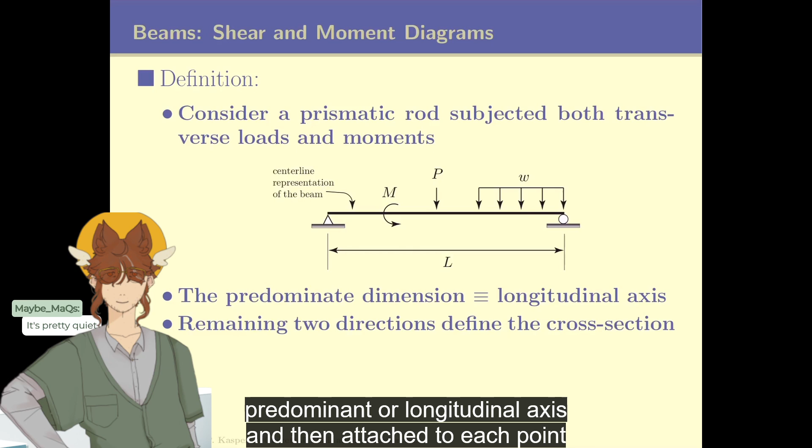How are we feeling about that - the predominant or longitudinal axis? Then attached to each point along that length, we're going to have a cross-section. That's very similar to what we saw with the axial model and also the torsion model, where...

The torture model. The torture model? Okay, wait, sorry. Okay, so... basically... the torture model is making sense.

Okay, prismatic rods subject to transverse loads and moments. So we just have a very long beam that has a very small cross-sectional area. The torture model.

We have a length of beam, and the basic idea is we're just gonna go along this beam and figure out all the additional stresses and stuff on it, which is gonna be fun. We can make a diagram for what those things are gonna look like. I have done these, but I didn't really do them well.

In this model, we would have a one-dimensional line that was the center of twist, and then attached to it at each point along the longitudinal axis would be a cross section, like when I walk across a beam, either solid circle or a hollow circle, and that's kind of how we're going to view this.

We're also going to restrict the geometry such that the cross section is significantly smaller in size than the length. It's like spaghetti. If you imagine drawing a circle around the cross section and took its diameter, it would be significantly smaller than the length of the beam.

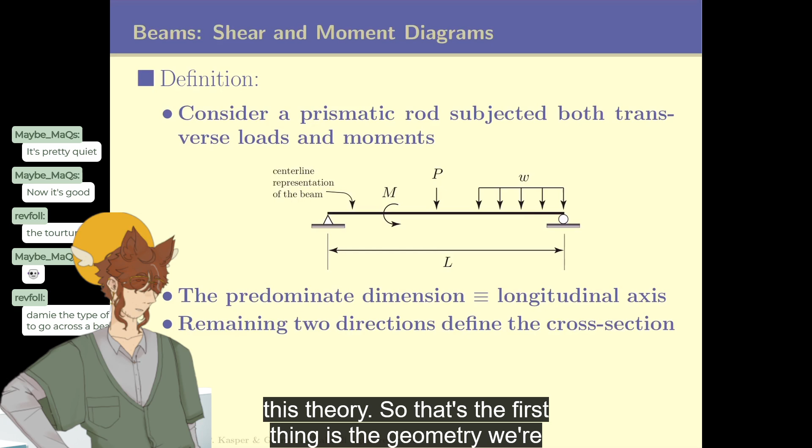We're limiting ourselves to setups where that geometric assumption is appropriate.

Basically, everything is beautiful and nothing sucks. That's the only type we're going to consider. We'll make some additional assumptions a little bit later.

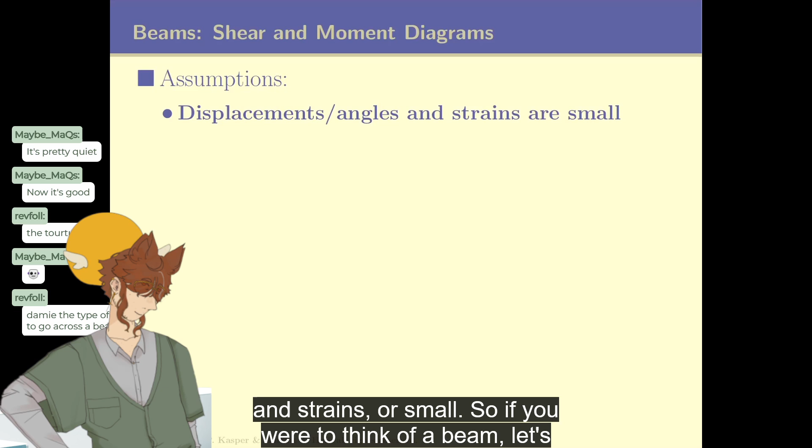The second thing we're going to assume is that our displacements and strains are small. So if you were to think of a beam, let's say something roughly of this geometry.

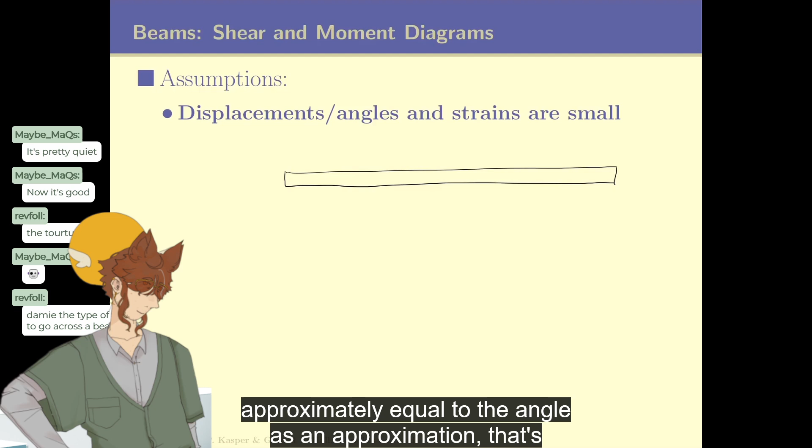The angles of rigid body rotation of the system are going to be very small, such that if I were to take the sine of the angle, it's approximately equal to the angle as an approximation. That's fairly appropriate—the small angle approximation.

The reason we don't allow for larger strains or rotation angles is because, recall, for the axial model we approximated the normal strain in the x direction as the change in length over the original length, assuming the body is rigid. We talked about how, if it wasn't rigid, we'd need to include a second order term, something like the change in length over the original length, squared.

The idea is that the linear strain measure we use only includes the first term—we don't have to do differential equations—because this second order term is approximately zero in comparison to the first term in the series. If that's not appropriate, then this theory isn't appropriate, and we'd have to use a nonlinear strain measure. That's broadly what we're talking about.

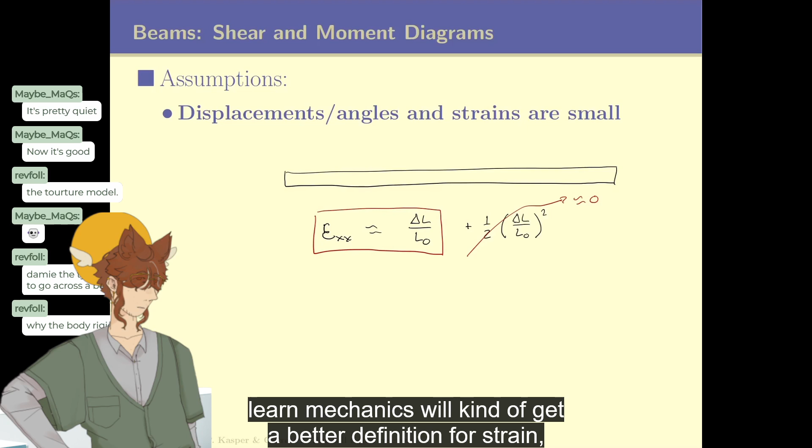We'll return to this later—as you go on and learn mechanics, you'll get a better definition for strain. But for now, roughly, the angle of rotation is simplified so it's easier to work with; you don't need that extra small correction. The first order term is kept, while the second order term is small in comparison to the first. If those two assumptions are violated, we'd turn to a different type of theory.

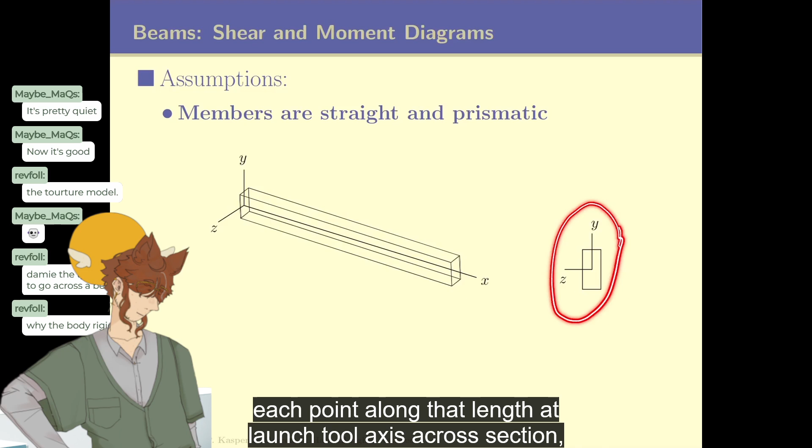The next assumption we're going to make is that the members are straight and prismatic. We're not going to allow for curved beams at the moment, so we'll limit our geometry to straight members, and then define at each point along that longitudinal axis a cross section, as shown here.

That'll be the next assumption, and then we'll consider just a couple types of loads: point loads, like shown here, point moments, and distributed loads. If you recall what's unique about this set of loadings—if you looked at the axial model, the loads were directed along the longitudinal axis. If you looked at the torsion model, all of our loads were again directed along the longitudinal axis, lined up with the predominant dimension.

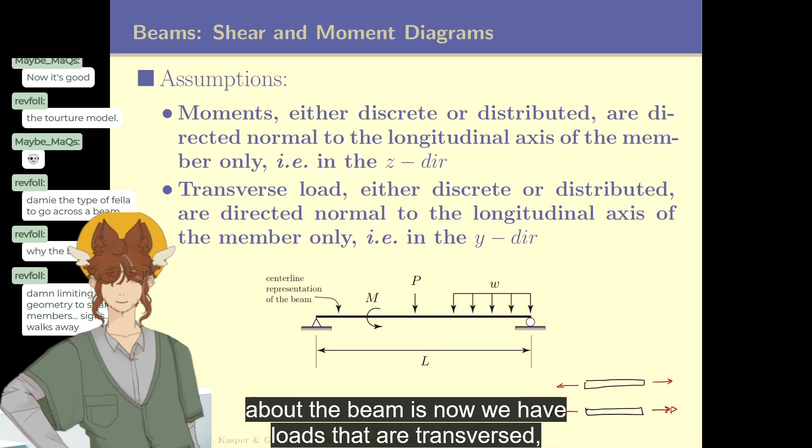Limiting their geometry to straight members, these new loads don't line up with the longitudinal axis—this is the first case we've seen like this. But it's still prismatic. These three types—point moments, point loads, and distributed loads—are what we'll consider.

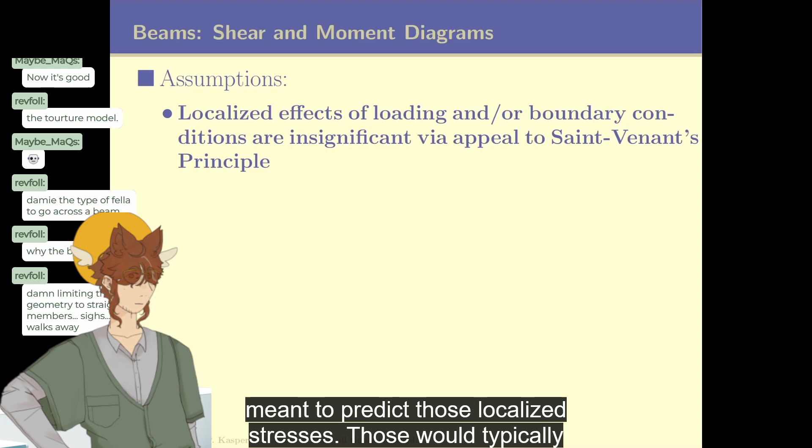The next thing we're going to do is neglect how loads get into the system and how the boundary conditions support the beam. We're neglecting that for now because it involves detailing - how it's bolted or welded, or how the loads are in contact with the beam. All those details introduce local stresses around the region where they're applied. This theory is not meant to predict those localized stresses; those would typically be dealt with in a separate design stage where you look at detailing.

We're going to assume for now that we're not looking at that - that would be handled through a separate design process. This idea that we can ignore the local effects if we're far field from those specific boundary conditions is referred to roughly as Saint-Venant's principle. We're going to appeal to that for now, ignoring how the loads got there.

What is happening? What is this class? Why are loads interacting with each other? Is this math? Okay, let me explain. What's the best way... let me go over to... wait, do I have clip up? I don't have clip up. Let me tell you exactly what this class is, in like two seconds - or maybe not two seconds, that's pretty fast.

This is a very simple class. A lot of my classes are like this. Because I'm on the quarter system, we tend to have very simple classes.

So it's like this: the idea is when you're an engineer - this is a civil engineering class - when you're building buildings, buildings are made out of things called members, which are like beams or whatever. We want to know what happens if we press down over here, and this is on a wall, or what if this member is attached to another member and we press down here. And we press down, but we also press down over an area - like maybe there's a big block here that's pressing down. And what if we also turned it at the same time, like we kind of twisted it? That's what this class is.

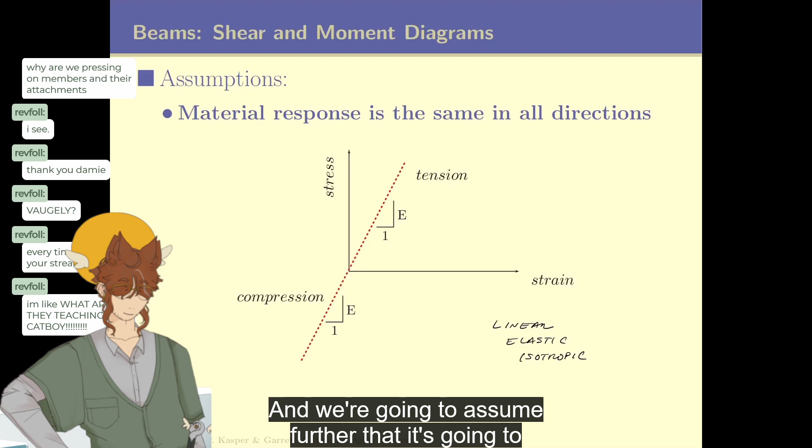We're going to assume it's the same in tension and compression. Here's an example where the line does not change, so you don't get a response like that. That would be a linear response, but it's bilinear because it has one response in tension and a different one in compression. We're going to assume it's linear elastic, isotropic, and the same in all directions.

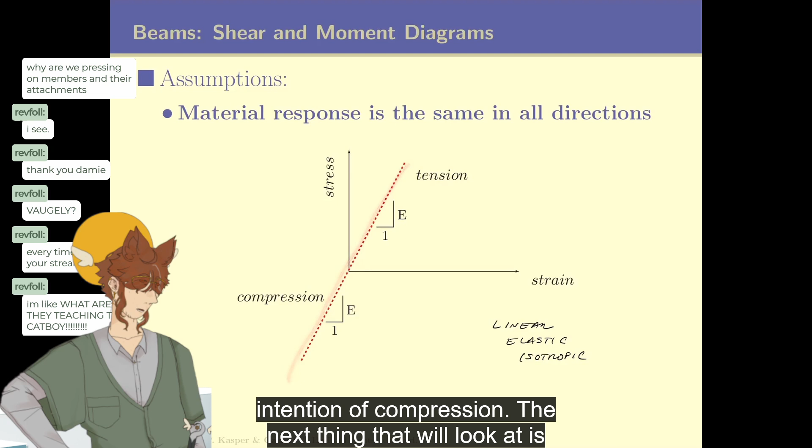The next thing is that we're not going to consider buckling. Just to remind you about the axial problem: if we loaded it like this, we could get a form of buckling. We didn't do any type of analysis on this, we just put it off and said that would be a separate stage in the process where you'd analyze the system for this type of global buckling phenomena.

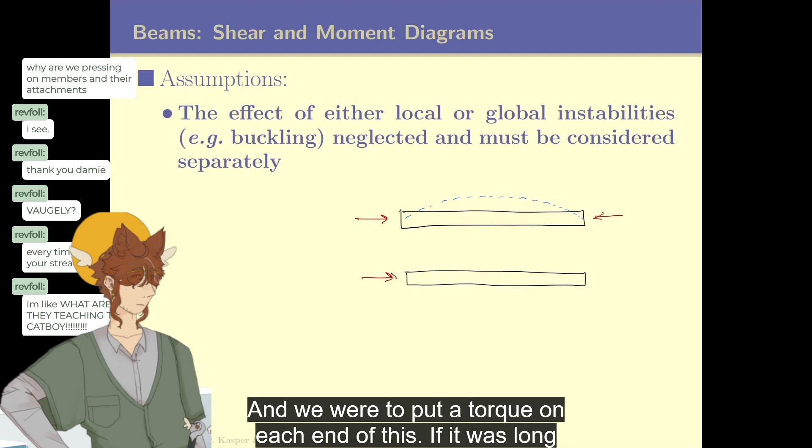Same thing when we got to torsion. If we had a torsional load, our members stay straight, and we put a torque on each end like this. But if it was long and slender enough, it would be possible to get this to buckle. I won't draw the shape very well, but the idea is it's a kind of helical buckling, so it looks something like this. That's a type of buckling you might see in a torsional problem.

In a beam, there's a similar effect where if you take a system and load it transversely, in this direction, supported like this, sometimes what it wants to do is roll out of the plane towards us. So this top surface kind of rolls down like that. That would be an example of a type of buckling you might see in a beam, referred to as lateral torsional buckling.

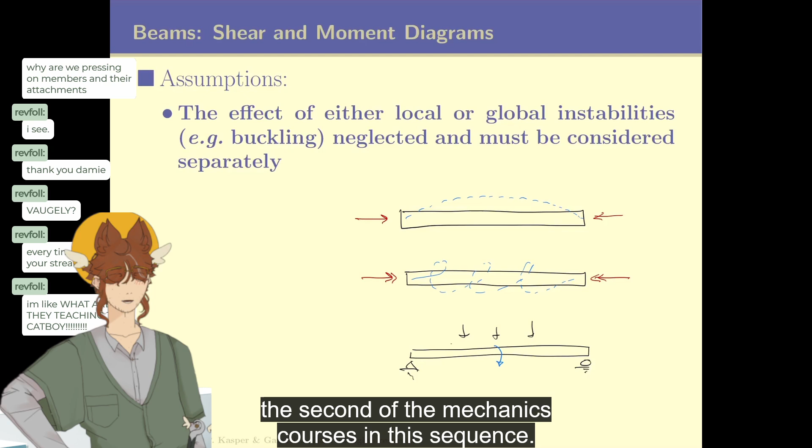Now we're going to do the thought exercise we've done a couple times now - what do you guys think of this one? This is a pretty good diagram. Loaded, we take the undeformed shape and draw a grid on it, that's this geometry right here. Then we imagine it's like a worm - we load the system and see what happens to those lines after the beam is loaded. On the right here we've shown this. Now this obviously violates some of our assumptions about angle changes being small, but we've exaggerated it here to get a feel for what the lines look like.

What we're going to learn a little bit later is that these lines that go this way and this way, for example over here, are still going to remain straight lines - they didn't twist. Those two lines define how the member has been bent before and after, it's like a happy face. That'll be one of the kinematic outcomes when we develop the theory of this. Visually, this is what it looks like, just to give you a feel in case you couldn't imagine what a beam looks like when it's deformed.

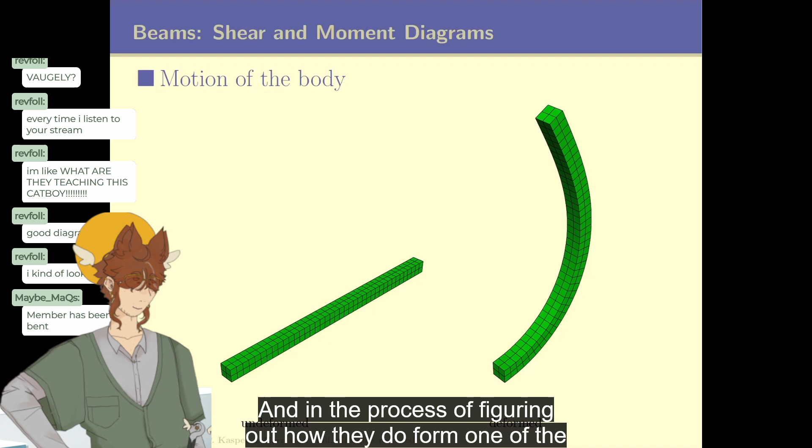In the process of figuring out how they deform, one of the things we have to deal with is how they're supported. So we're going to talk about boundary conditions next - everybody's favorite from statics. We'll go through some simple boundary conditions, using some symbols that have a very specific meaning, which are sometimes counterintuitive.

Let's take this roller on the right, for example. This is a normal beam. You would think, okay, if I load the beam vertically like this, that roller doesn't do anything and it would just rotate, it would lift up off of there. That's not what it means. The symbol is just an abstraction - it represents a boundary condition that can provide a reaction either vertical, up or down. So this roller could have a reaction up or down.

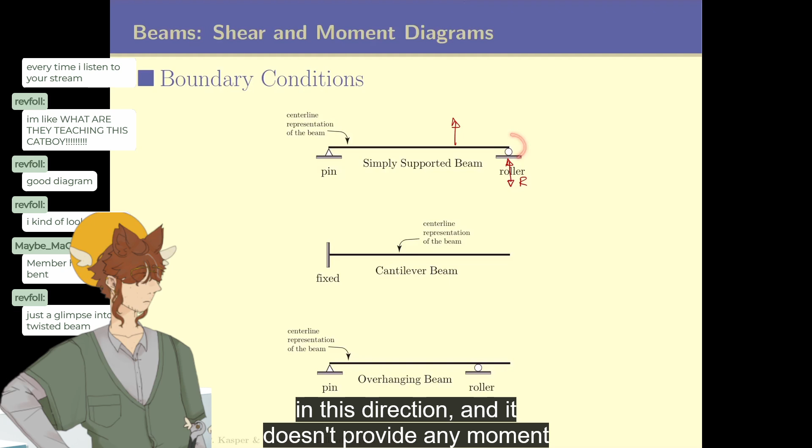So this would be the unknown reaction. It's like a magnetic roller, that's what I was taught. It can't provide a horizontal reaction, and it doesn't provide any moment resistance. On the other hand, the fixed support can provide a resistance either up or down, so a reaction that way, and it can also provide a moment.

Also, I want to note this video on reactions is kind of long, a little bit long, and we're already partly into it. This video is like 40 minutes long. My lecture is 2 hours long, and this video covers the same amount of content.

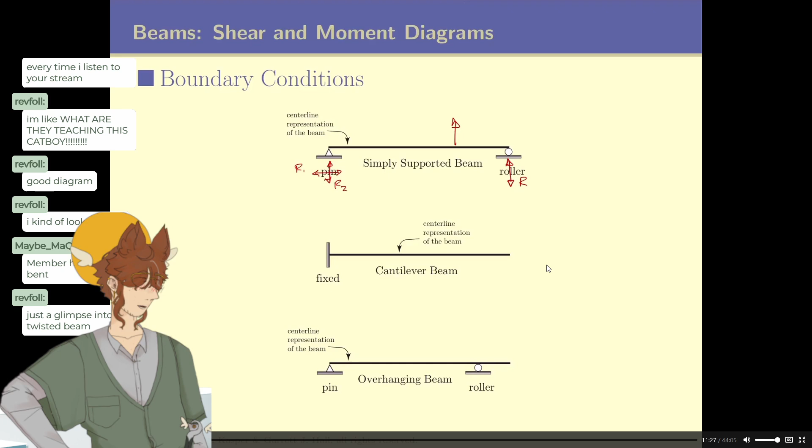So for a fixed boundary condition, I'm gonna have a reaction either vertical, up or down, or horizontal, which would be in either direction. And you can choose whatever direction you want to call positive for all these, because these are external reactions.

We're just going to end up solving for them. And similarly, if you look at this case here, there's an external reaction here, which could be either way. Oh yeah, cantilever. The external reaction, a fixed support, restricts a moment from the internal forces in the beam.

So what I'm getting at here is that in this particular example, when I look at this roller and say there's no moment reaction here, that doesn't mean that the beam at that point, let's say right here, has an internal moment equal to zero. That's a different thing. So we have to be very careful when dealing with beams to distinguish between internal and external. The supports are essentially providing us external forces.

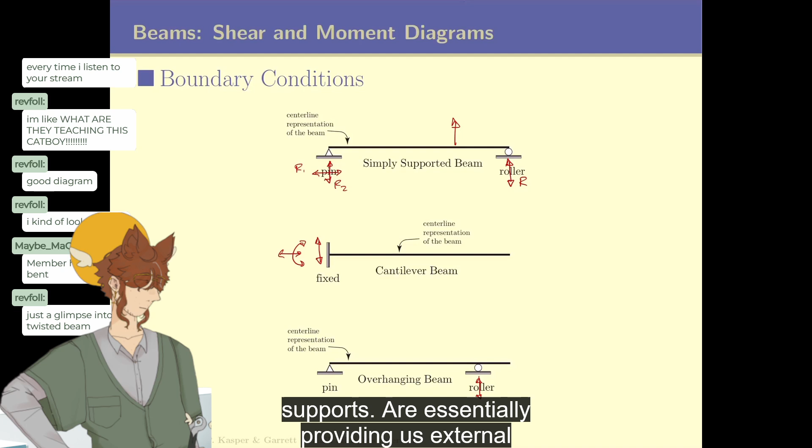The loads are essentially external forces, and it's not that hard. Just think about if you can move it up or down, and then if you can twist it. If you can't twist it, then there's a moment. But for now, let's go through all the different boundary conditions you might encounter. If you can't move it up or down...

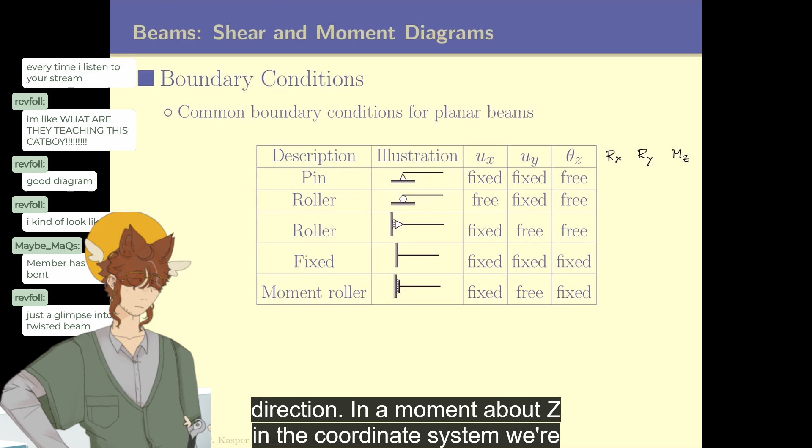I'm going to add a column to this table, and the columns I'm going to add are going to be the reaction in the x direction, reaction in the y direction, and a moment. The coordinate system we're using here is: this is x, vertical is y, and z is coming out at you, so x cross y is z. What I want to do in this last set of columns is note whether or not there's going to be a possible reaction in x, y, or moment z. So we'll just go through them one by one.

So let's start with the pin. And the idea is that...

Oh, my laundry. I gotta go get my laundry. Wait a second, is the display... oh no, I can't. What do I put on? Should I put on Cocomelon? I can't, I'm in the math category. This is also not really math, but we're gonna pretend like it is math. I feel mildly bad that I'm just in the math category with mechanics and materials, but there's not a mechanics and materials category, okay?

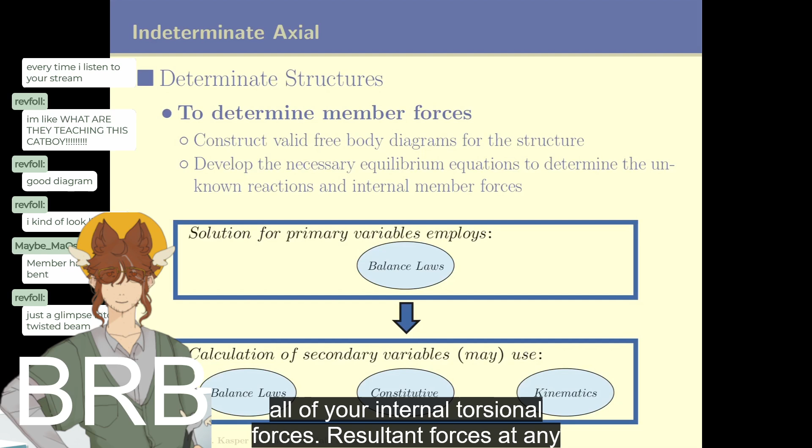We have been working on torsion problems and the torsion model for the last week or so, and today we're going to look ahead to indeterminate torsion. We'll find that basically it's very similar to axial indeterminate problems, in the fact that you just distinguish between determinate and indeterminate. The real distinction, in the context of solving either a torsion model or an axial model, is basically when you do your balance laws and go through your free body diagrams, you're able to find all of the external reactions and all of the internal axial forces in the context of an axial model, or all of your external reactions and internal torsional resultant forces at any point in the structure, just using the balance law and free body diagrams.

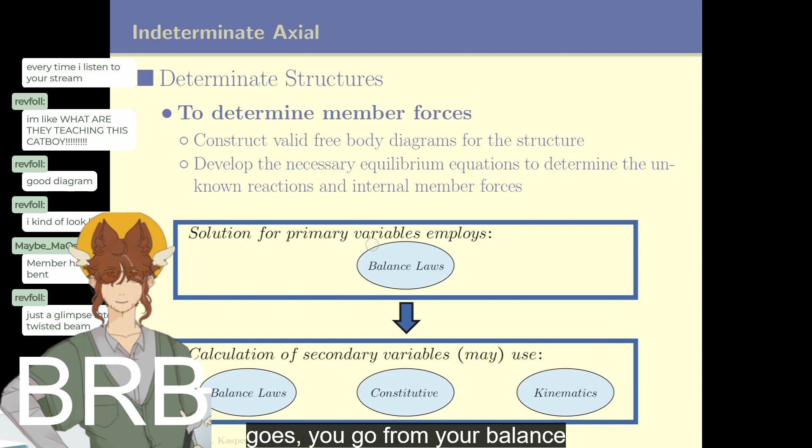So if that's the case, then when you go to calculate angles of twist, or stress, different quantities like that, all you have to do is take those values and plug into the secondary equations. So the methodology goes: you go from your balance laws directly into calculating your secondary variables of interest.

Now, when we go to an indeterminate problem, just as was true with axial, we find that we're going to have to do the balance laws, but at that point we will not be able to solve uniquely for the internal forces in the system, so the torsional forces in each section of the shaft we may be looking at. We may not be able to find the external reactions, but we'll be able to express them in terms of a set of unknowns we have some control over, so we can set up the free body diagram in terms of one unknown reaction and eliminate another. But bottom line is at this point we won't be able to get numbers in an indeterminate problem. We'll just get expressions that relate forces at different points in the structure.

And then we can use the constitutive relationship, which will relate those unknown forces to displacements in the system. And when I say displacements, we're talking about generalized displacements. If we're talking about an axial model, that would be an extensional or contractional displacement, a change in length. If you're talking about a torsion model, what we refer to as a displacement is really a rotation, an angle of rotation. And we'll be able to express those in terms of the internal forces using the constitutive relationship.

And then at that point, you'll still have a set of equations that aren't closed. You'll have more unknowns than equations. And so to close the set of equations, you'll have to write down a kinematic expression which relates the displacements. In the context of a torsion model, that would be rotations, so that you can solve the set of equations.

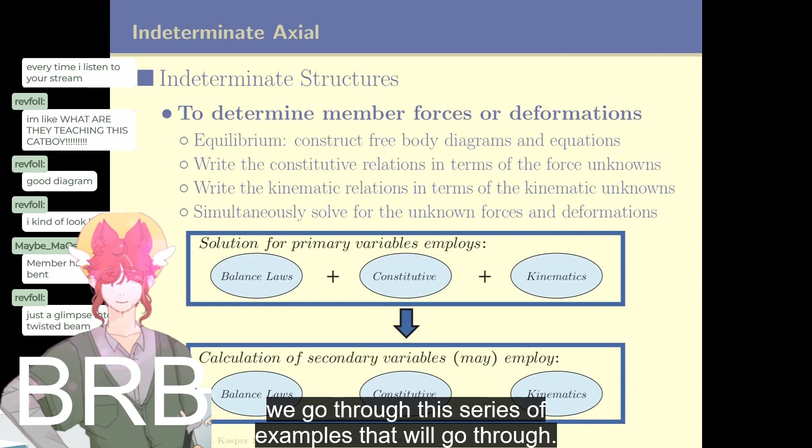However, I want to encourage you, when you go through these indeterminate torsion problems, to be very precise and careful with your signs and how you draw your free body diagrams, and pay attention to all the details. The details turn out to be very, very important. So as we go through this series of examples, take note of how we're drawing our internal unknown torsional force, our resultant torsion. When I draw it, note what direction we're assuming it to be in, because that sets up your kinematic equations. Just pay attention to the details, and you'll find it's really not any different than a determinate problem, other than the solution step where we'll have to do linear algebra. So let's go take a look at some examples.

Why am I sparkling on? What's happening? Wait, that was only 3 minutes? Hello? I thought that was a lecture. Did you learn about the indeterminate axial problems? Or maybe he just taught it really fast. Honestly, that's also possible. Wait, that's so sad. Just a glimpse, sorry, I just saw just a glimpse into my twisted beam. Yeah, okay, well I'm back. We're winning. Man, I'm really glad that they have notes that are more than 3 minutes. Wait, are they actual? Oh never mind, the notes are just really short for that. Maybe it's actually just straight up short.

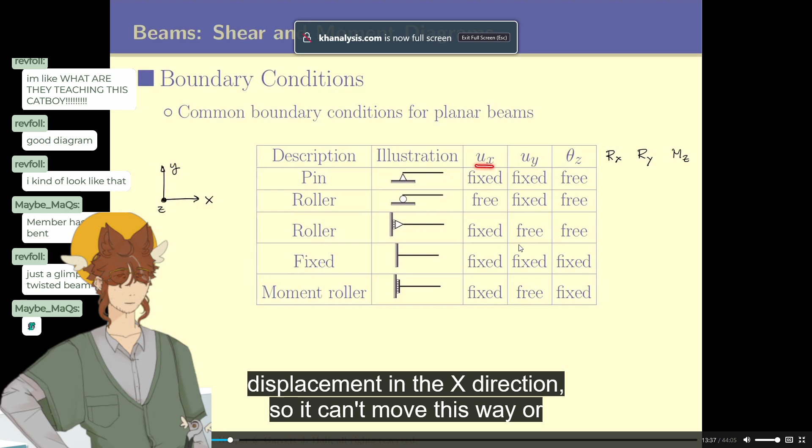Okay, anyway, we're back. In the x direction, so it's locked, can't move this way or this way. So we're essentially saying - my roommates have been saying locked in so much - that's what the word fixed means. It's going to be specified.

Can I get a chicken on screen? If we know... I really want to cover up some of this with chickens.

We would have to solve for the reaction in the x direction. So this would be, yes, we would have a reaction in the x direction that we'd have to solve for. Same thing for y. Wait, so it's yes, yes, no - fix the vertical displacement. So I'm saying I know what the displacement of this point is.

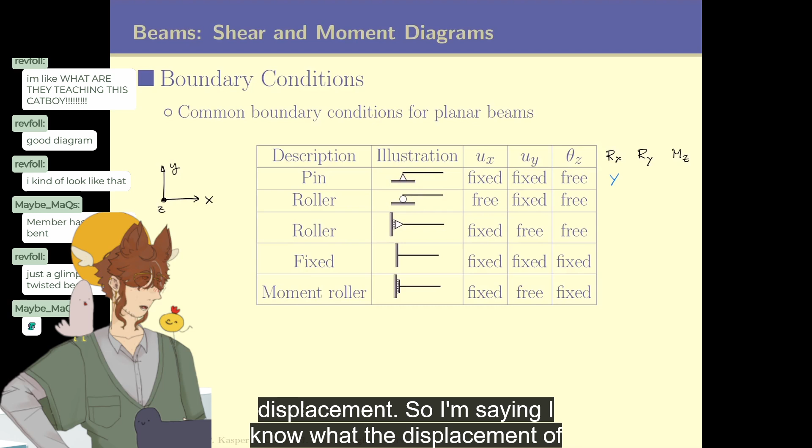What about the moment? In this case, it's not preventing rotation. So what does that imply? It implies that if it's free to rotate, there's no resistance, so we know there's no force. So in this case, the moment about z is known. Do we have to solve for it? The answer is no, because we would know what it is based on the fact that it's free to rotate.

These last three columns ask: do we have to solve for Rx, Ry, and moment about Z? I'll put a little header on this. You would solve for these using statics.

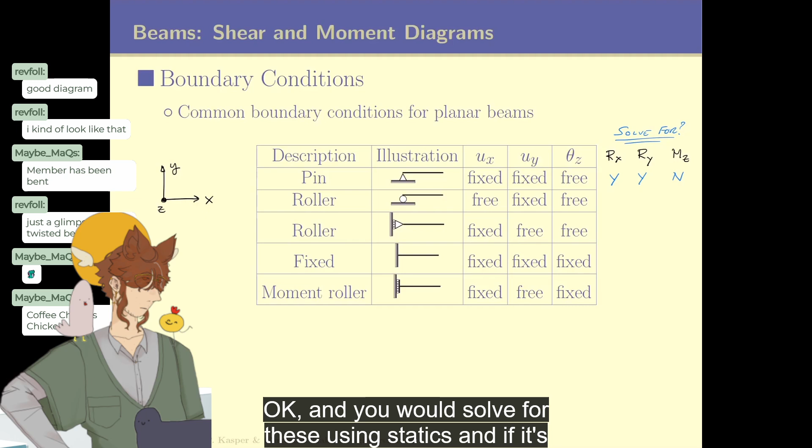The pattern comes from the idea of energy conjugacy, and I would just remind you of what external work is. I like that term, external work.

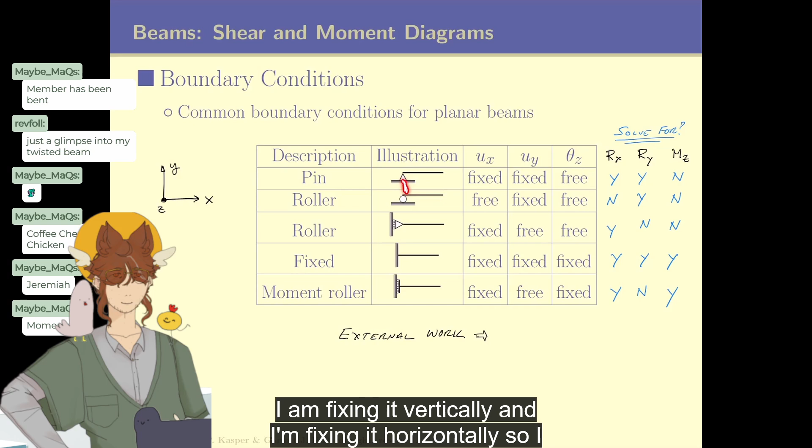If I look at the pin as an example: here at the pin, I am fixing it vertically and fixing it horizontally, so I know UX and UY, and I'm going to solve for RX and RY. So what's the external work done by that system? It's going to be UX times the force acting through RX, plus UY acting through RY.

If you look at this, that's an energy term, right? It's a force acting through a distance. You'll notice that these terms are at the same point and acting in the same direction. UX is at the left end of the beam, and RX is at the left end of the beam, and they both act in the X direction. Same thing with Y: UY acts at the same point as RY, so they're at the same place, same direction, and they're energy conjugate, because when you multiply them together you get a form of external work.

What you'll notice is that anytime you have a boundary condition, you can specify either the displacement variable or the force variable, but you can't specify both. That's consistent with how these boundary conditions line up, if you look at the pattern between these columns. You can't specify both, because then it's not a problem — you don't have anything to solve for.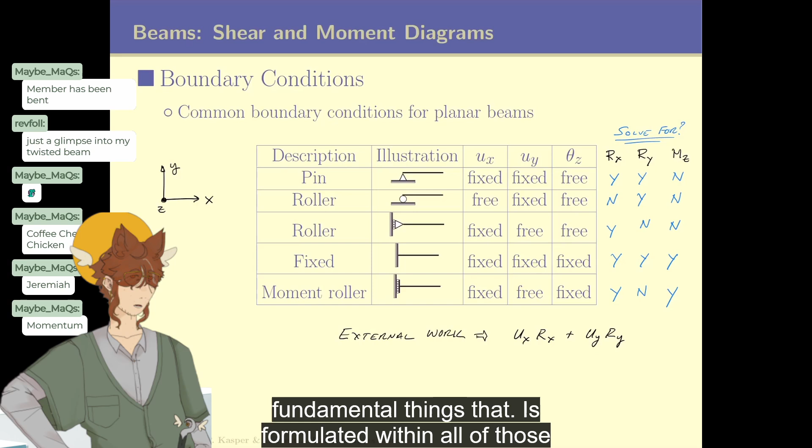If you go on to study mechanics and want to do finite elements, this is one of the fundamental things — specifying energy conjugate variables. This is like the behind-the-scenes of all those analysis procedures, like when you're trying to design something.

Let's say I'm working on a frame and trying to figure out how to make it so it doesn't break. If I want to constrain the displacement of the frame, I could say, okay, it can move 0.5 millimeters, or maybe 1 millimeter. Then I would be able to solve for how much force that exerts internally on that beam. If I specified both the displacement and the force, it wouldn't be physically accurate, because I would just be giving random stuff — I couldn't say I want it to displace 1 and also have a reaction force of some value, because you can't do that.

It's just funny that he didn't explain it quite like that — he just said you can't specify both. But really, you could specify both, it's just that there's only one physically correct answer among the energy conjugate terms. It depends on what you're solving for — you can only specify one or the other, but not both.

So just a bit of background on where these boundaries come from and how we're going.

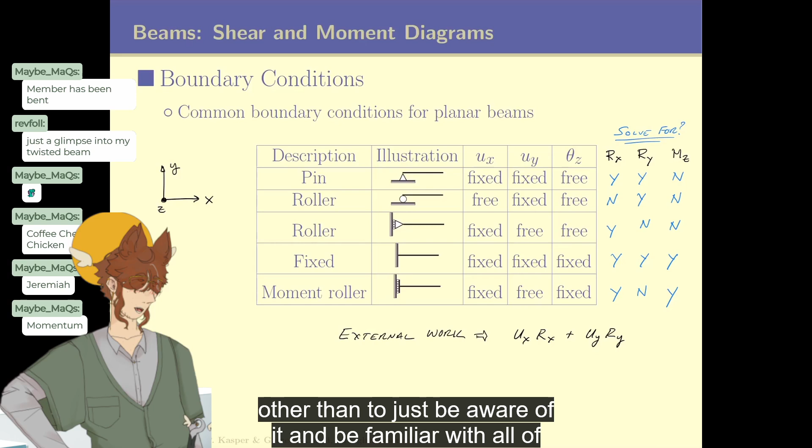This is so funny because this is like my internal monologue when I'm listening to professors. I'm like, well, it's like yes and no. And be familiar with all of these boundary conditions as we go through them, and we'll see plenty of examples.

So the next thing is we are interested in finding the internal forces in these beams. We have all these external supports, which give us external reactions. We have external loads, and we're trying to find what's happening interior to the beam in the model. So we're going to take free body diagrams, which cut through the model. By doing that, we'll be able to solve for the internal forces in the beam. So let's talk about what those internal forces are and how we might solve for them.

So wait, here we have a free body diagram, and the free body diagram that's shown on the right, I'm going to go back for a sec. And it comes from taking this free body diagram right here. I just want to see if this is important.

For a planar two-dimensional beam, there exists 3 equations for the internal forces. Okay, no, that's just regular statics. Just 2D equilibrium, so we get 3 equations: sum of forces in X, sum of forces in Y, and then moments.

So here we have a free body diagram. And the free body diagram that's shown on the right, I'm going to outline, and it comes from taking this free body diagram right here, and we're cutting it with plane BA, and this FBD is showing...

Oh, I remember this vaguely. Now, what are we looking at here? Well, we have an external force. This is like an external load. And then we have the cut plane, and in the cut plane, we're revealing internal forces in the beam.

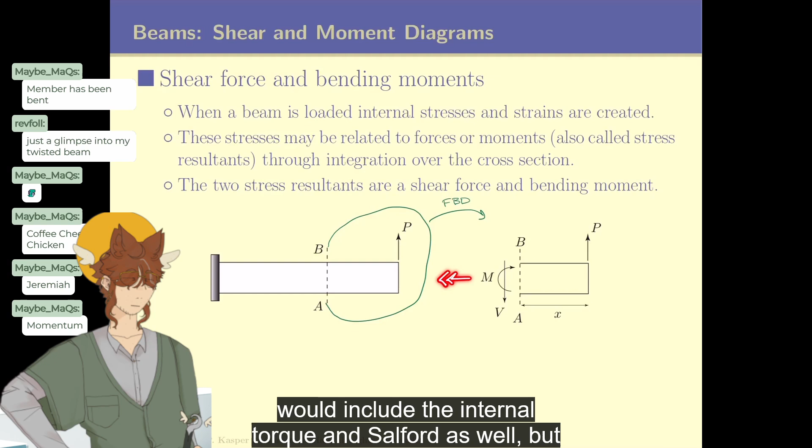And if that's the case, then we would include the internal torque and solve for it as well. But it was specifically left out of this problem because we don't have any torque supplied. So it's pretty easy to see that those two would be 0. So that's the first part: just because it's not shown doesn't mean it wasn't considered.

So we've been doing all the stuff in the X direction. So like your moments are going to be kind of around, twisting around the beam, lying in the X direction, or your forces are going to be in the X direction, like tension or compression, so the beam is getting squashed or stretched.

But now we're kind of pulling it up or down and seeing what internal forces come out of that, which is exciting. That's pretty cool, because that happens a lot.

You know, like, if this is... I mean, there could be a person standing on there, and that could be the load applied there. In general, you're going to consider all possible internal forces, so you might have moments, shears, axial, torsion, and they could all be acting at the same time. We'll get to problems like that later in the course.

The second thing I want to point out is I could have taken the free body diagram from the other side. So if I look at this side over here, the reaction, and I draw this FBD below, what you can see is that I have the boundary condition to the left. And what do I have on the right-hand side? Well, that's not an FBD because you just didn't free the body. This cut plane right here, it's still the BA cut plane or AB cut plane, which is the same as this face right here. So those are equal and opposite faces, right?

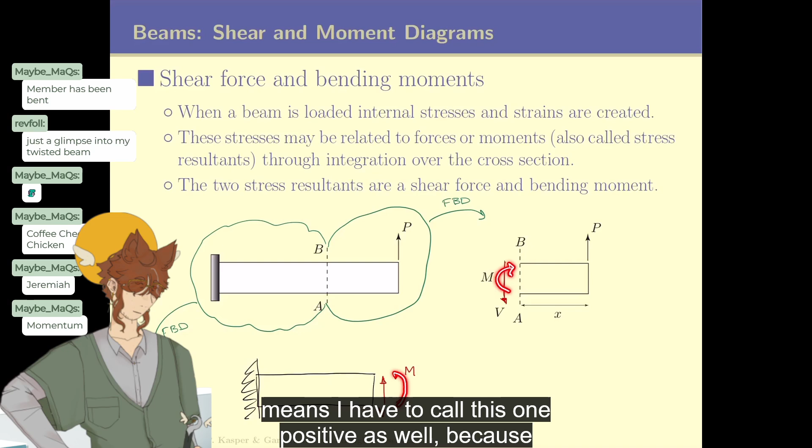If I decide, for example, that this is what I'm going to call positive, I'm going to call that moment positive. You'll notice that, well, then that means I have to call this one positive as well. Because they're the same moment, right? Just acting on different planes, and they have to go in those directions because of the principles of mechanics.

So I've got one of them going into the paper. Bro, what? That's crazy. But that's not a convention, that's everything positive. And so it's a little weird the first time you see it, but that's a necessary construction of this.

Same thing, necessary construction. Here, the shear is going down, and if I choose to call that positive, then I would have to call this one positive as well, because they have to be the same. That's so weird, right? It's not like one could be positive and the other could be negative. Bizarro world, the same thing.

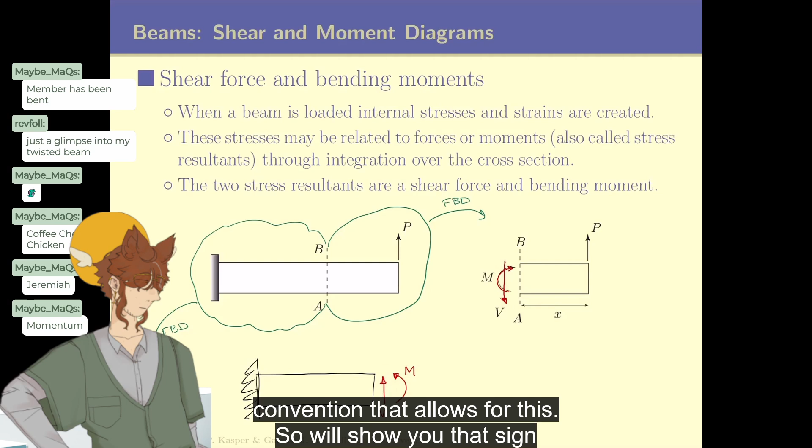So that means that I have to have a sign convention that allows for this. So we'll show you that sign convention here on the next slide. Basically what it looks like is as shown here, and as a piece of background information, I'm going to draw the beam.

Let's have this guy shush for a second. So for V, it's like it's still clockwise. Okay, wait, never mind, that doesn't work because it's clockwise. Man, why couldn't they say if V goes up and the other V goes down? Fine, okay, I'm just gonna have to remember these. So if the V on the left goes up and V on the right goes down, that's positive.

And then if the moments both sort of go up, the moments I feel like are easier to remember. Sign convention. I feel like it doesn't really matter that much. Okay wait a second, don't quote me on that. It does matter, it just doesn't... depending on how you do it, it doesn't matter as much.

Because sign conventions in general, it doesn't really matter how you do it as long as they are consistent. Other than the fact that some other people are going to be like, oh my god, you are dumb if you don't do them the way that normal people do, like if you called the y-axis x and the x-axis y, then people would just be like, what is going on, you know? But so here's a beam.

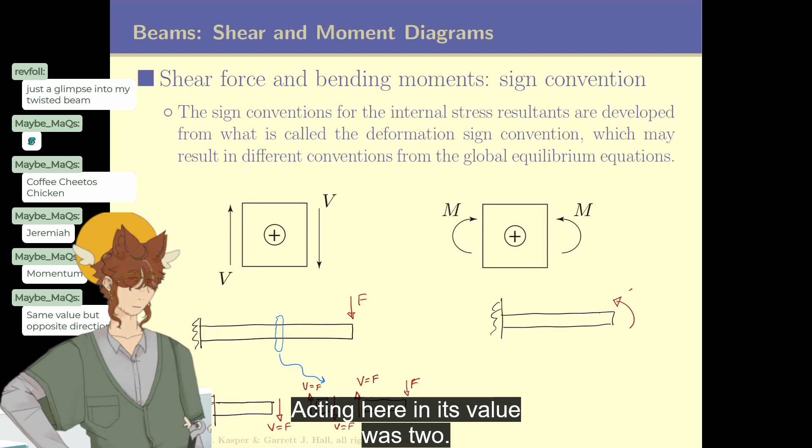So let's just say we had some moment acting here, and its value was 2. And I'm going to take the same approach. But basically, here, so maybe I've got this long beam.

Like this. It has some loads on it. It's got maybe moments, it's got point loads, it's got all kinds of things going on.

And what we're going to do is we're going to take one tiny little slice out of this. So let's say this little slice right here, and we're going to pull it out. And that's the free body diagram shown down below.

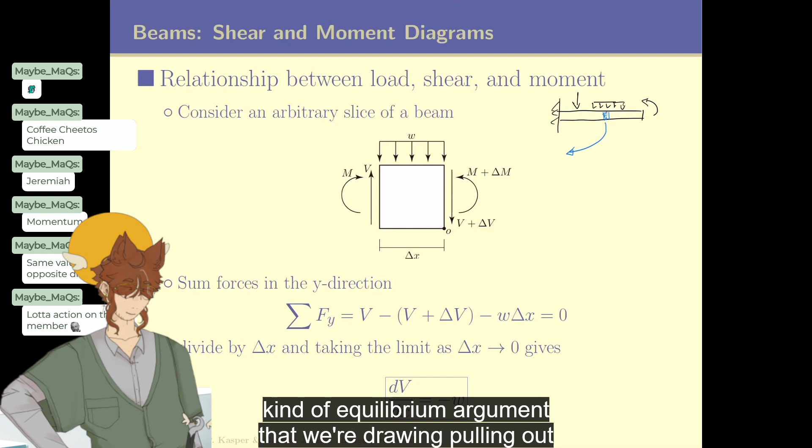So if I have on the left the moment, on the right I have the moment plus an increment in the moment, that's this delta M. Likewise, if I have the value of the shear on the left, on the right-hand side I have the value V plus an increment in the shear over the distance delta X. So that's the equilibrium argument we're drawing, pulling out this little slice, and we're saying that the moment and shear can change along the length. So basically, they're functions.

Now, with that being said, we can just apply equilibrium to it. We don't have to think too deeply about it. And if we do that, it's not that deep, bro. Don't think too deeply about it.

To this expression, if we take the limit as the increment delta x goes to 0, basically what this is is the increment in V divided by the increment in x equals negative w. But if we take the limit as delta x goes to 0, we get the expression shown there. So what does that mean? Well, it's telling us that the slope...

Wait a second, hold up. We're summing the forces in the y direction. Oh wait, never mind. I was like, why is it the distributed load? And it's the distributed load because literally it's in the y direction. I just saw the bar across the distributed load and I was like, oh yes, in the x direction. We have no forces in the x direction. And our moments are just not in play yet. Okay, dude, I was tripping, I'm not gonna lie.

Okay, so we would get delta V equals negative w delta x, and then dv/dx equals negative w. So the slope of the shear over x is going to equal negative w. So the magnitude of the distributed load - that's what it is. Shear is equal in magnitude to the value of the distributed load.

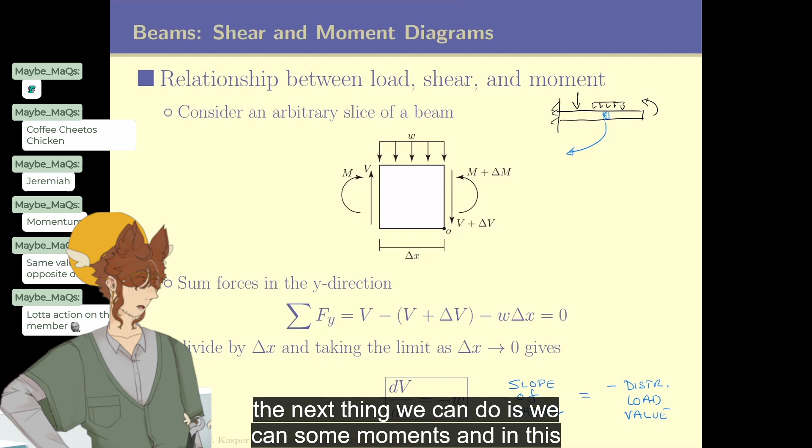We can sum moments, and in this case we have this little point on the right that we're going to use, this point O. We're going to sum moments about O and repeat this same argument. Sum moments about here's O. And now what shows up in this is we have a couple of terms. We have obviously the moment terms - so that would be this, this, and this. But we also have the shear term times its increment, so that's this force times this increment. It's going to give us a moment about O.

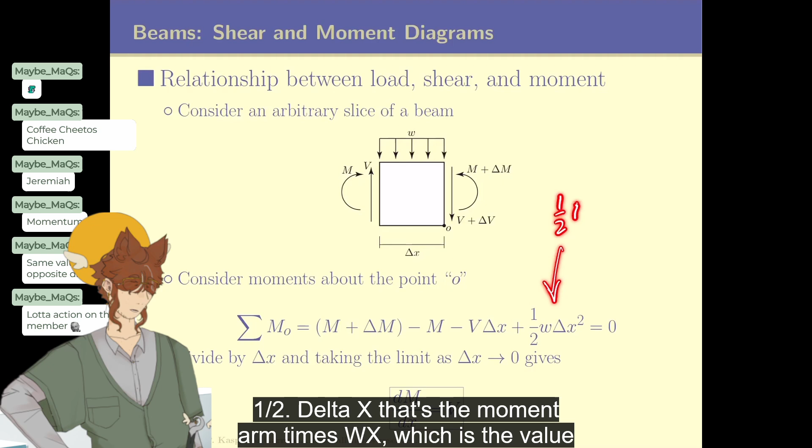What's up with that W delta X squared? The sign here being negative. And then the last thing we have is the distributed load. So the effective force caused by the distributed load acts through this point, and its distance is delta X over 2 - that's where the 1/2 comes from. And the value of the total force is W times delta X. So basically this here is 1/2 delta X, that's the moment arm, times W delta X, which is the value of the force.

Now, if we take the limit as delta X goes to 0, we're going to neglect this term - it's going to drop out because it goes to 0 much faster than the term that has delta X in it. And we'll make the same argument as on the previous slide. Take the limit as delta X goes to 0, so the increment in the moment divided by... oh my god, having subtitles in a lecture is so nice. And so what we find, it just equals V.

On the previous slide, yeah - the slope of the moment, which is the internal moment, is equal to the value of the shear, and that's the internal resultant force, the shear. We'll get to do some practice problems in between these. It says that the slope of the moment is derived from the value of the shear. So we're going to use that fact quite a bit to essentially solve for moments and shears in beams.

And just to kind of take a step back, what's the reason for doing it?

The reason ultimately is we're going to use these moments and these internal shears to calculate stresses. So that's what we're after ultimately.

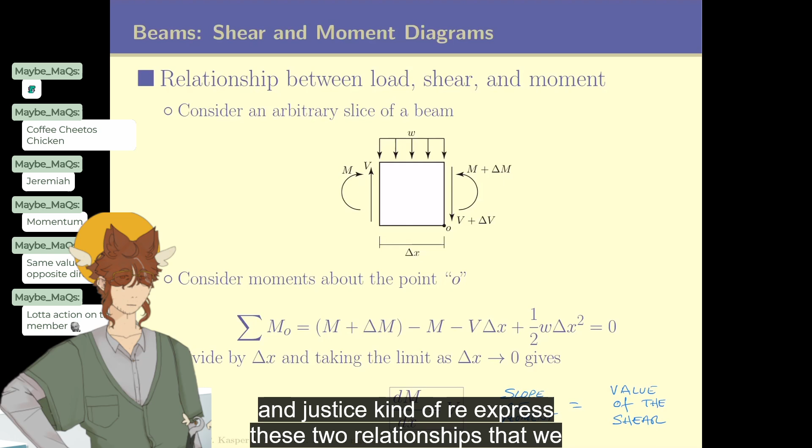Good, big picture. Let's take a moment and re-express these two relationships we found, these two derivative relationships, on this next slide. The idea is that if I have this relationship that the derivative of the shear is equal to the negative of the value of the distributed load, I could rewrite it to essentially express it differently.

To give you an idea of what this means, I'm going to draw a made-up problem here, so don't read too much into this. I'm going to plot vertically this W function. This should be a plot of what the distributed load looks like as a function of position X. Let's just say it looks like this.

Basically, we're going to graph this as the value, and it goes from our loads, and then we'll turn them into moments based on the slope.

So I'm looking at this region right here, from point A to point B. I'm going to highlight the area, plotting W. Okay, the area under that curve, what is that?

That's this term right here. So the area under the distributed load curve works out to be equal to what? Well, it ends up being equal to the change in the shear between point B and point A. So this area is equal to VB minus VA, in other words, the change in the internal shear between points A and B.

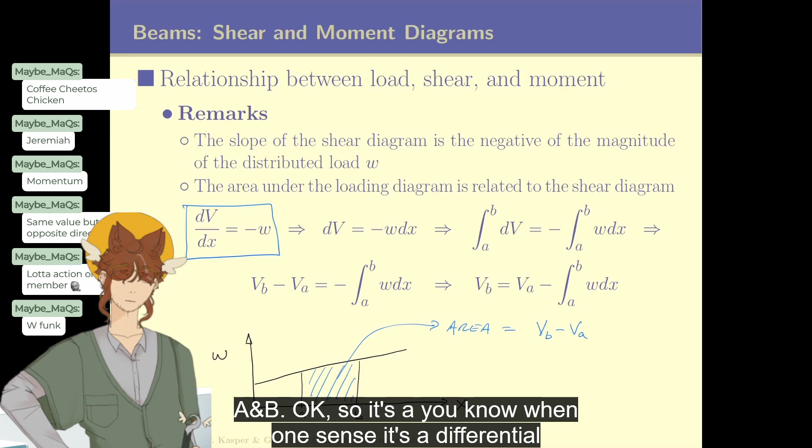So in one sense it's a differential relationship, and if you rewrite it this way, you need to prove that. Sure, and that's more often how we use it, in this form shown on this slide.

We can kind of flip the script on the moment expression also. Same idea. So if I were to plot here, let's say we had X, and this is the shear. Well, this one we actually use, the shear function, but it's also like a constant.

Let's just say as an example, kind of intuitive, right? Like if your moment is going to be sort of like an integral of your V, you're going to be using the area under the curve to get your stuff.

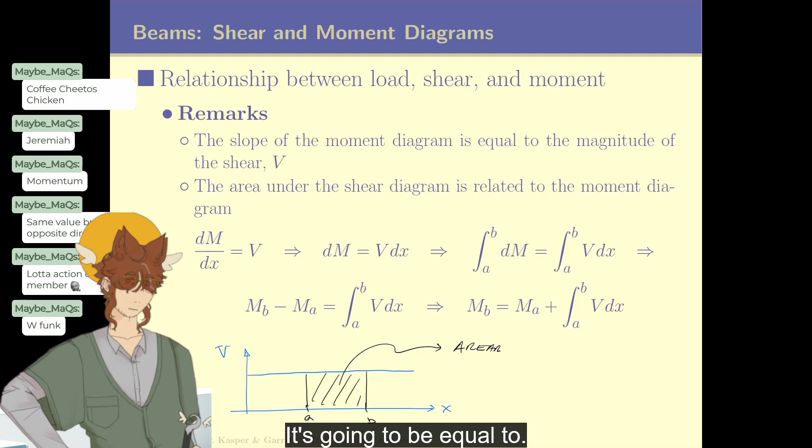When you have a distributed load, that's a force acting over an area, whether that's a 1D, 2D, or 3D area—well, it wouldn't be 1D, that'd be a point—so a 2D or 3D area, you sum up the entire load and place it on the centroid of that load, the center of gravity of the load. So if it's a square, you'd place it right in the middle of the square, or if it's a circle, right in the middle of the circle.

But normally we just do that. We don't need to say the area under W because we don't need to integrate our W's—we just kind of only have constant W's, which I guess is kind of sad. But the area gives us the change in moment, and that's the second interesting point that comes out of this.

So where did these equations come from? Just to remind you, they came from balance of angular momentum and balance of linear momentum—sum of the forces and sum of the moments. They're very fundamental relationships. There's nothing special here, but we're going to use these again.

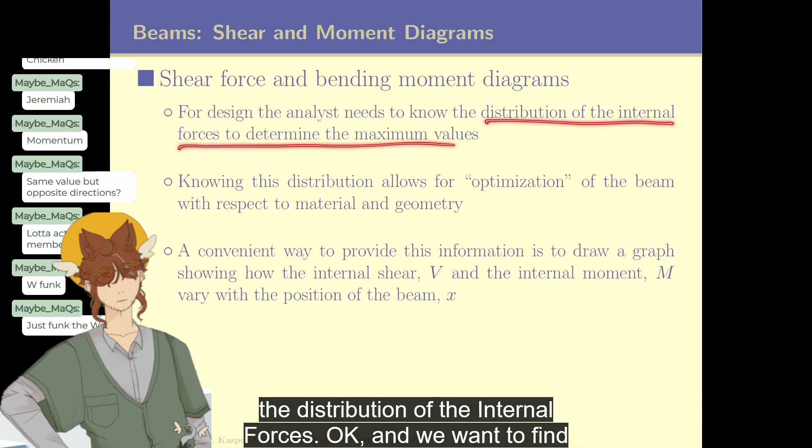The reason why is we want to know the distribution of the internal forces, and we want to find maybe the max values, and sometimes the minimum values as well. If the beam goes from 0 to L on the x-axis, I would like to know the moment—maybe this is the moment curve.

It's probably not going to look like that very often, but that's the idea. What is it? It's going to be some function, and we'd like to plot it over the length of the beam. Same thing with the shear—we'd like to plot what the shear is as a function of position.

The reason we're after this is because this is the first step in trying to figure out what the stresses are at every single point in the beam.

Damn, bro, every single point in the beam, that's like so many points. I don't know if we really need all that. We could just do a couple, you know.

For failure calculations, if we want to know the strains, we would have to plot the moment and shear diagram. Even if we weren't interested in stresses and strains at every single point, if you wanted to know just what's the displacement of the beam, how much it's deforming, you would need to know the moment in the beam.

Like it's in dynamics—we started doing rigid bodies, you have to be able to draw them. There's only one omega for every single angular, there's a different v, but they all have the same omega. So you can't be putting a million omegas. I don't want to put a million anything in a problem ever.

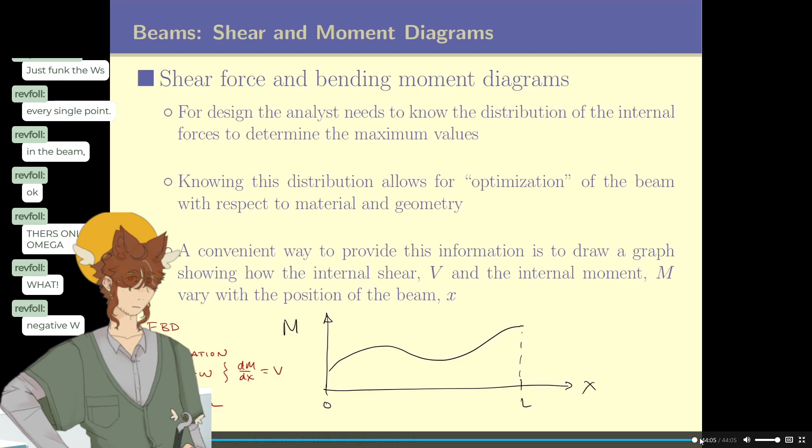We did it, gamers. Okay, let's pick a fun problem. Let's do this one. This is fun. Let's ball a little. I cropped the wrong thing there. Don't know why I cropped my sound.

Let's head back over to the whiteboard. Here we go. Let me move this out of the way. Alright, so... let me... oh my god!

Wait, metal pipe actually worked to be loud? How did it work to be so loud? Normally metal pipe is so quiet. Oh wait, because my actual computer volume is up very high right now. Normally I can't hear metal pipe. My member—sorry, damn it, keep a hold of your members.

Constrain those guys to the ground. Why is this written in blue? Okay.

Alright, let me turn up this music just a little bit. Of course it's this song.

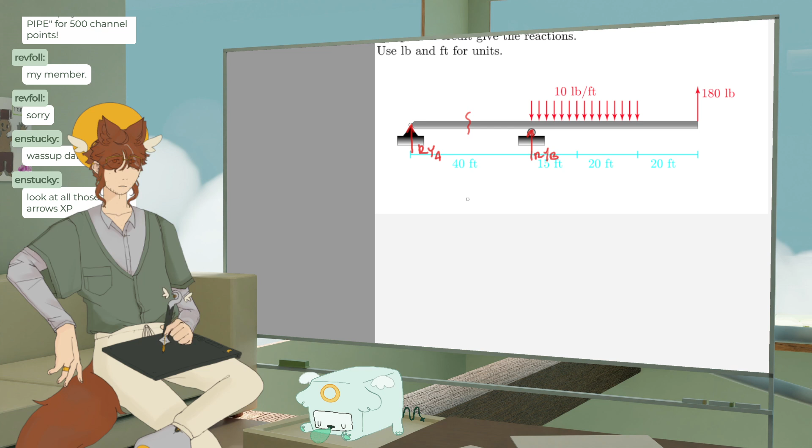I don't know if I need to draw the reactions. I probably need to find the reactions, right? Wait, but if I do statics, it's like indeterminate. I'm already stuck, I love that. Let's maybe just do this one, let's start with that one.

Wait a second, I have an example, I did one of these before. Let's see what he did first. Okay, oh my god, what is this? Okay, no, yeah, okay, we did equilibrium.

This is scary, I drew a lot of scary things in this lecture. Okay, so we kind of split it down in between each thing. So there's gonna be these kind of distinct segments here. Right? We okay with that?

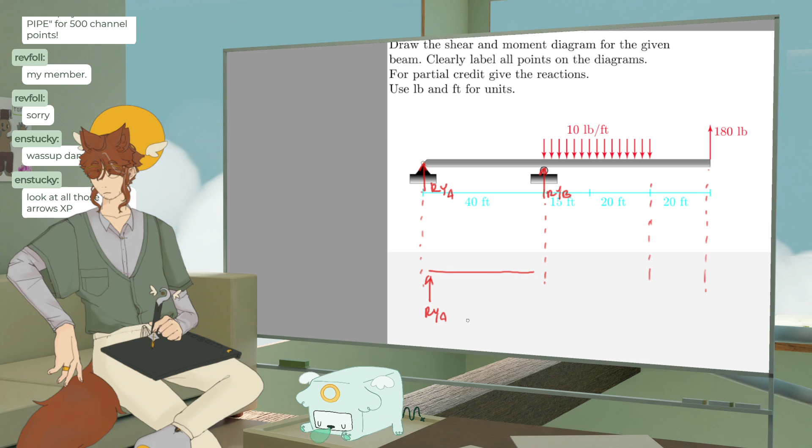Yeah, okay, so we take this segment of the beam. There's a reaction here. Did we take the one at B? No, we're gonna go right before B, so it's gonna be like right there, sort of, but we're gonna assume that it's right here, you know?

But I'll do this. Okay, so we're gonna have our up-down type thing. So this one's gonna go up, I guess, and this one's gonna go down. And then our moments, let's say they both, well, okay, let me maybe start on the other end, because I might actually be able to get these moments correct.

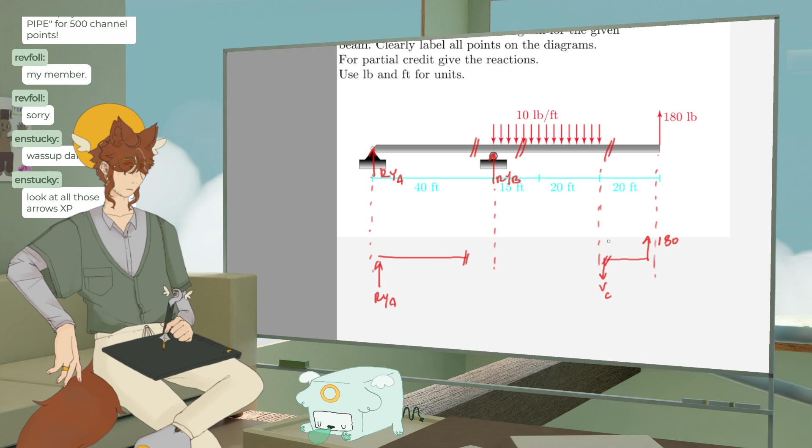Semi-correct. Okay, we have an up arrow going this way, 180. And then we have, okay, so the force is gonna go down, that's our V, our VC. And then we also have a moment that's gonna go, well, if we sum the moments, that one's gonna go this way, so we need this one to go this way. Moment C.

Okay, so we can do the sum of forces in Y, C. Sum of forces C, Y. Sum of forces, yeah, C, Y equals - sum of forces Y, C, I like that better - equals 0. We're gonna have 180 equals VC.

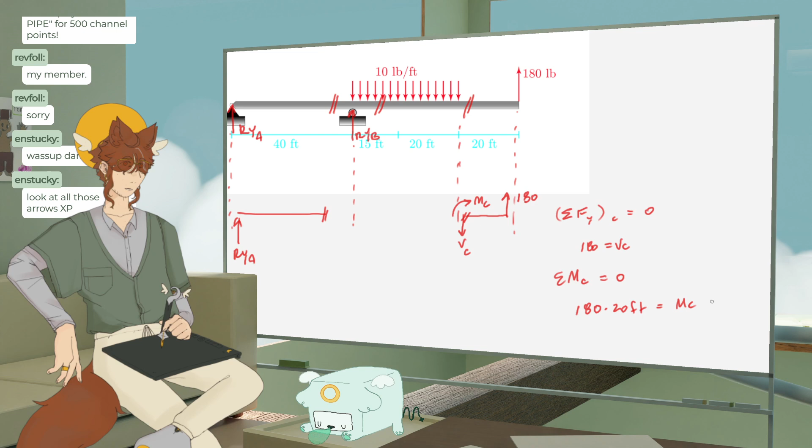180 lb VC. Okay, nice, nice, we're winning. So now we have to figure out these boys. So this is MC, and then B is gonna go up. Oh god, my thing is getting a little cramped. Okay, where do I put RB?

Oh okay, wait, wait, maybe I can just make a free body diagram for the whole thing? No, no, I can't. Maybe I can. Wait, maybe I goofed it, guys. I might just make a free body diagram for the whole thing and not split it up. I just do a big equilibrium? No. No.

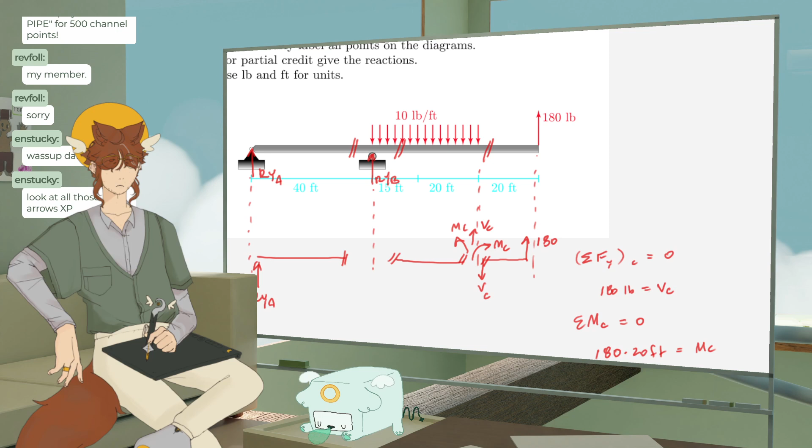So, okay, let's draw on the reactions. Sorry for my Discord messenger. Okay, we got two reactions. And then we want to do... yeah, so some of them... so global. Okay, I don't want to put global EQ right here, I'm going to put it off to the right, because I need space to draw the thing.

Oh, I see, we want to draw the graph here, I guess. Not the... I was a peasant for thinking we were supposed to draw free body diagrams underneath it. It has to be the graph, the load graph.

Here, here. Okay, does it start at 0? No, it doesn't... wait, it does start at 0. It's taking a long time to save, uh-oh. Oh, we're good, okay, I was really worried it crashed.

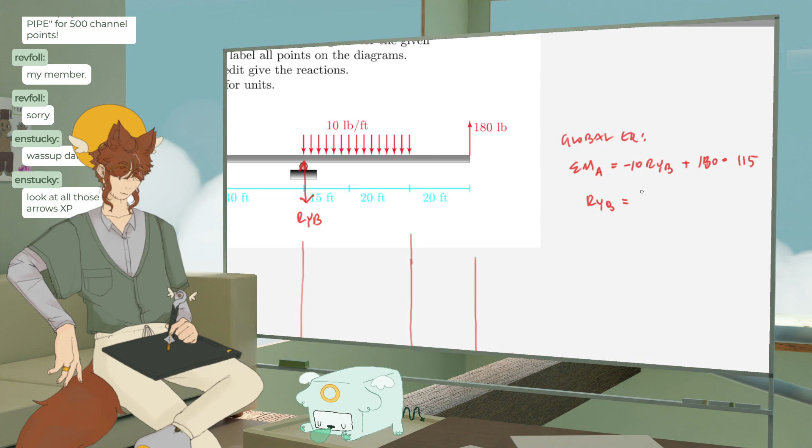Okay, sum of moments about A equals... so we have 10 RYB, plus, oopsies, RYB is not in that direction. Minus 10 RYB plus 180 times, let's see, 40, 20, 20 is 100, 115. So RY equals, let's work that out. Okay, we got 180, so 115 divided by 10, 2070. Is that true?

Nope, because I forgot, we also have to do this one. So this is gonna be, okay, 10 times, oh I'll do that over here. So that's gonna be minus as well. Minus 10 times...

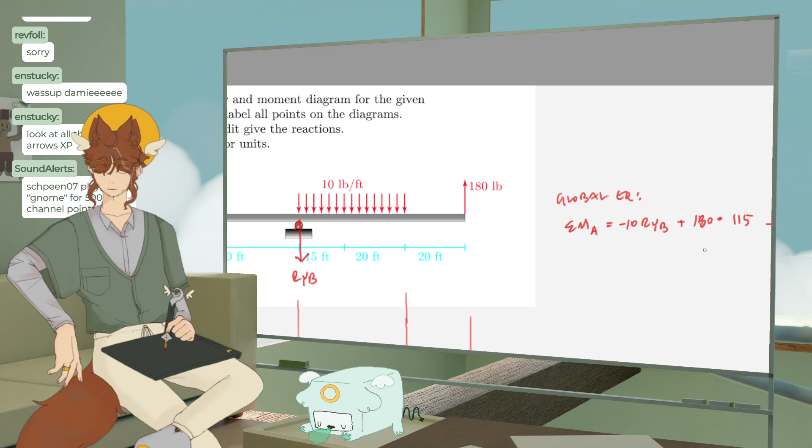10 times 35. Woo! Times, and then let's see, 35 divided by 2 is a number that is not coming to me instantly. 17.5, I thought it was that. I thought it was 17.5 plus 40. Okay, this actually might go upward.

Let's see, so 180 times 115 minus 350 times, what did I say? 17.5 plus 40? 57.5? 575. But that's also not, wait, 57.5? That's not right. What's happening?

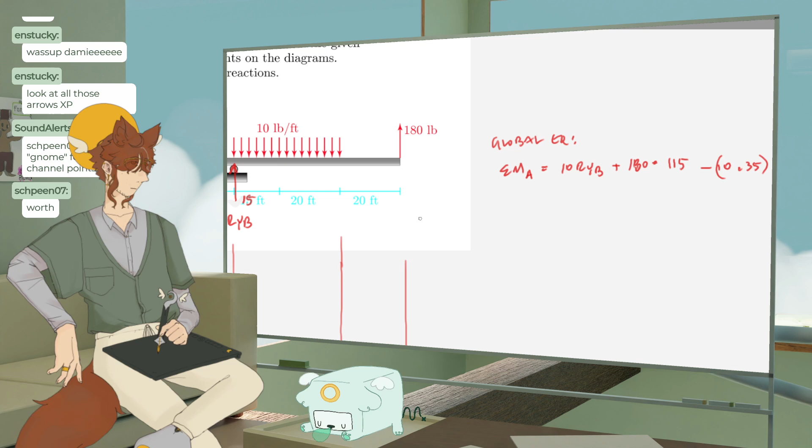RB, why is it? Oh, because it's divided by 40. What am I talking about, not 10. Also still not right. What is happening? Let's check my numbers. Okay, I'm gonna redo this real quick.

Okay, so we have 40 RYB minus, okay, 10 times the distance it acts over, so 350 times the centroid, which is 40 plus 17.5, 57.5, plus 180 times 40, 20, 115. How is this not right?

I like just plugging numbers in and slowly going insane because I know they're right, but expecting them to be something else. 14 point... I'm getting 14.375, which is not correct. Why? Am I missing something? Am I not doing the centroid right?

Oh, it's not 32, wait did I say 32 divided by 5? No, 35 divided by 2. Where is 57.5? That is from the centroid of this. So this is 35, and then we divide that by 2 to find the centroid, since it's an evenly distributed load, so that's the 17.5. And then we say, how far is it out from the moment arm? So 40 plus 17.5, which would be 57.5, I think.

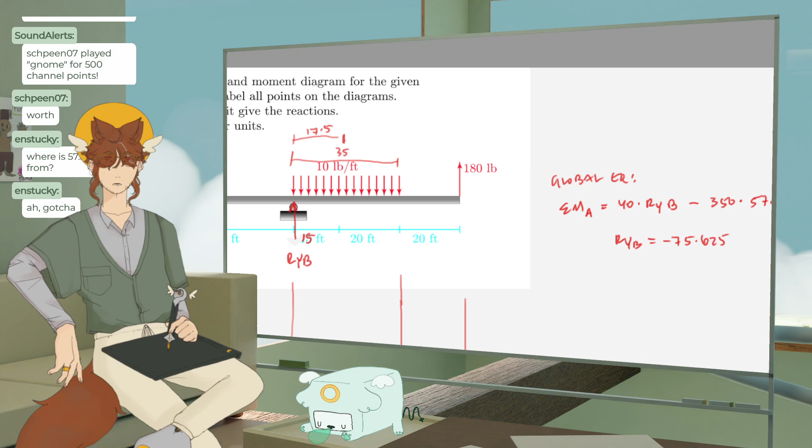Here we go, 95. Oh, wait, divided by 40? 75, okay good, we're winning. 75.625, and it does actually go down, so negative 75.625. Wait, why did I get a... oh no, it's fine, it's positive, because it was on the same side.

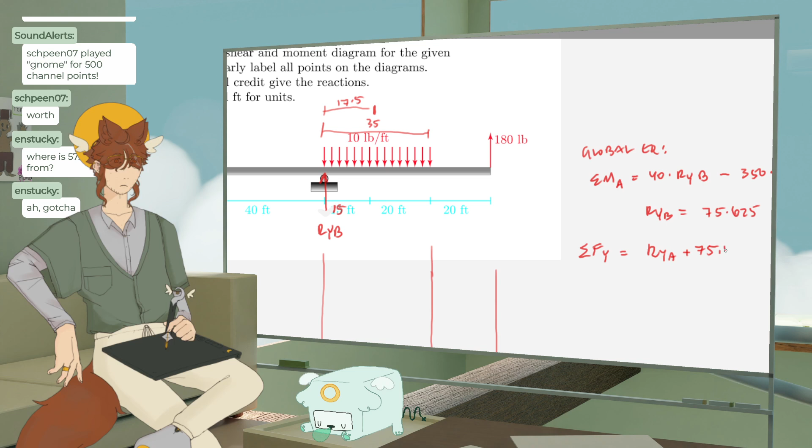Now we can finally start to do stuff. So for forces, we're gonna go up. So this is our 94.375, and nothing happens after that. So we go to this point, we start at 0, we go up, go over, and now we have this distributed load. So actually we go up again because we have this reaction here. So we go here, now add these two.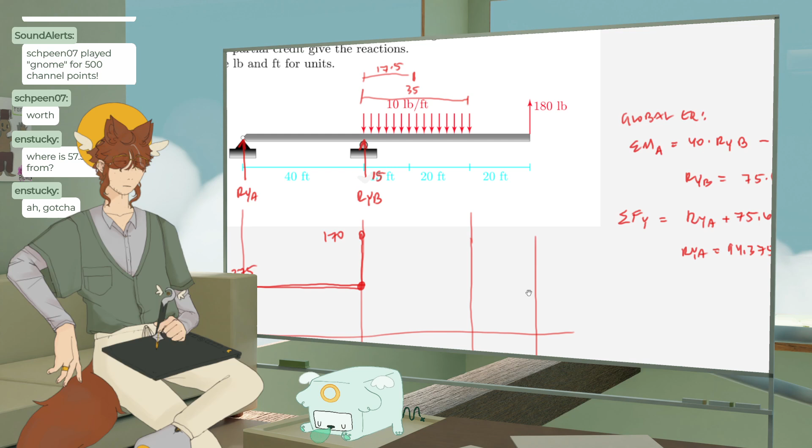170. And then we have this distributed load, so as we go across over here, we're going to be 350 lower, so 170 minus 350 is acting in the opposite direction, so negative 180. Here-ish, it doesn't have to be to scale. And the slope here is going to be negative W, I believe. Oops, I don't know why I wrote that there.

Here. Yeah, so the slope would be like that. And then when we hit this point, nothing is going to happen. Go over, and we go up 180. Look at that, we got back to 0, so we did it correctly.

And you see we have a closed loop. We start at 0 and we end at 0.

Great, okay, now we have to do the moments. So that's the V. And for moments, our guiding equation, like we saw in the lecture, is that the slope of the moment equals the load.

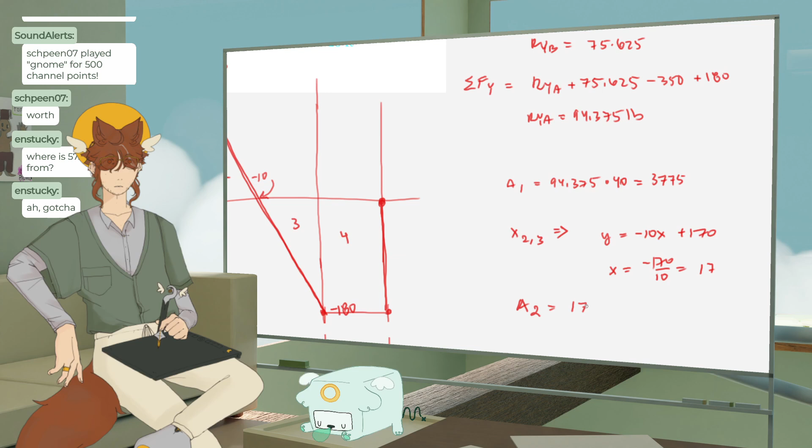So a2 equals 1/2 times 170 times 17. That's 1445.

Alright, so that is gonna go to here. And we have a slope here, so I'm gonna leave it sort of resident sleeper, Damie.

This is, dude, the person I asked to get notes from his class, they sent me some problems, and I was like, oh, were we only doing problems? And they were like, no, I fell asleep during the explanation. Like, dude, I'm dying over here, please.

Times, okay, 17, what's 35 minus 17. 18. I don't know why I had to calculate that.

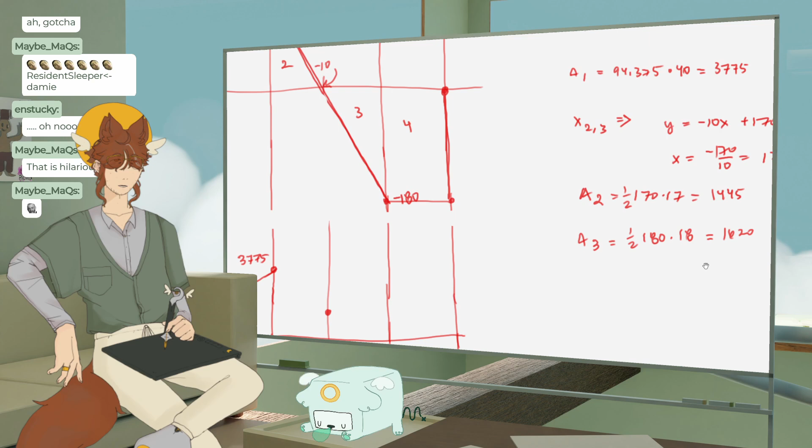Oh no, okay, to be fair, you know, it's a 7 a.m. class, it's early in the morning, but also I was like, if you're gonna go to class and you're gonna fall asleep, like just go home and sleep. That's what I think, you know what I mean? That's what I do, at least. That's why I didn't go to class. I feel like it's so much more disrespectful to the professor.

Okay, the slope is very large up here, which means that the moment is going to be large, and it is decreasing like this.

No. Yes. No? Maybe? This, and then the other one. Wait, I'm thinking. Moment should increase on that interval. No, because the load is going in the other direction. So it should decrease. Should it? Okay, it might not decrease. Let me think about this. Wait, what is it doing? Let me get rid of this.

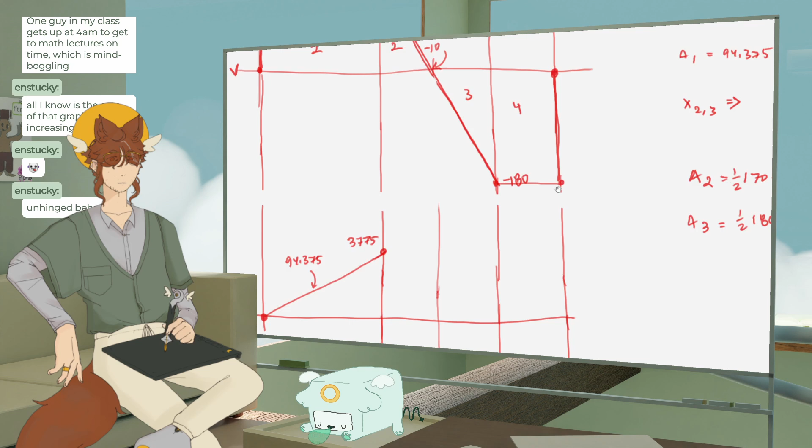Oh, it goes down because it's in the negatives. Lol, it goes down after. I was like, that's, why is it doing that?

So 3775 plus, what do we... there we go, 5220.

Yeah, because it's going down to 0, and then we go up to a negative value. So this minus 1620. Perfect.

Okay, it's a little goofy. There we go, and then last one.

The music, I love the tulip music.

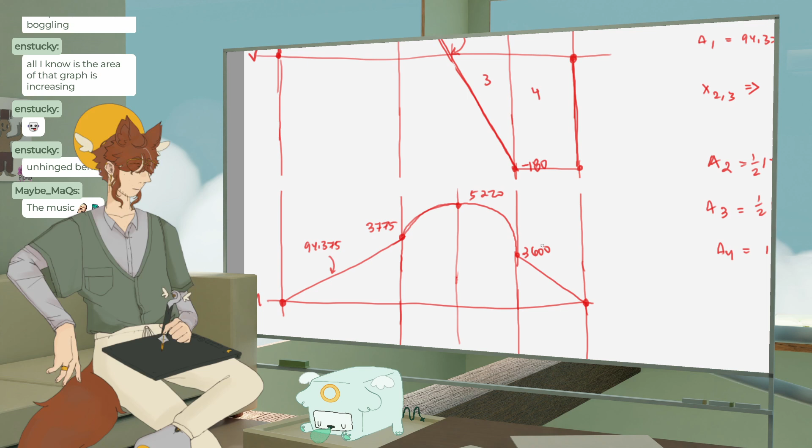Okay, perfect, yeah, because this is negative, so we go down straight across like this. It's like a hat. Perfect hat, or like a crow, you know? Like here's the eye, would be here. The beak, and that's the neck.

I'm sure my professors love it when I do this on diagrams. I just think it looks like there's no harm to it. You can still see the diagram, you know? It's still there. Ooh, Corvid Coon.

A lot of work. That's a lot of work for one problem. Kind of goofy, kind of silly.

Okay, let me see. Let me do a torsion indeterminate first. And then I might do another one of these.

Oh, I see, oh, these aren't... okay, I just don't know what he might give, because he usually tells us during lecture.

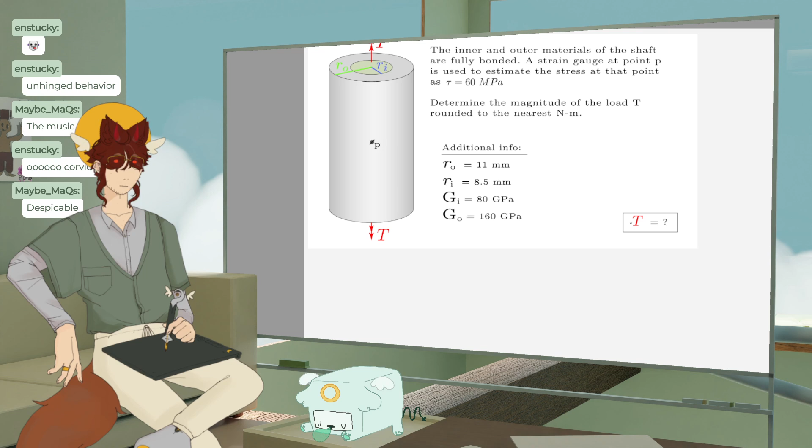Alright, stress, strain, determine the magnitude of the load T, round to the nearest... at point P, in the middle of it.

How do I do this? Let's think. Okay, well we always start with equilibrium. Why am I writing in red? That's evil. First you don't succeed, always equilibrium. We have our big boy, and it's gonna have a torque here, and a torque here.

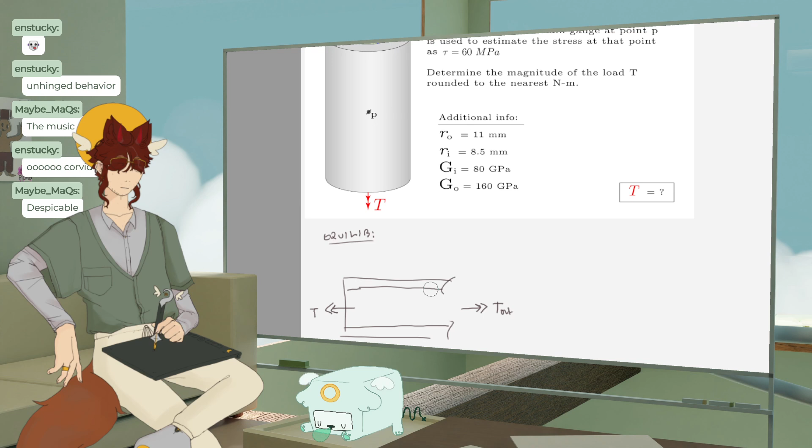Now I'm not exactly sure where point P is, whether it's inside or on the outside or what's going on with that. So this is gonna be our torque out. Well, I guess it's kind of like this. Or I can do the statics out, and then we have our little boy.

Let's see, so then we have to do the constitutive equation. So the angle of twist out equals the torque times the length out, which they don't give us I guess - it'll probably cancel.

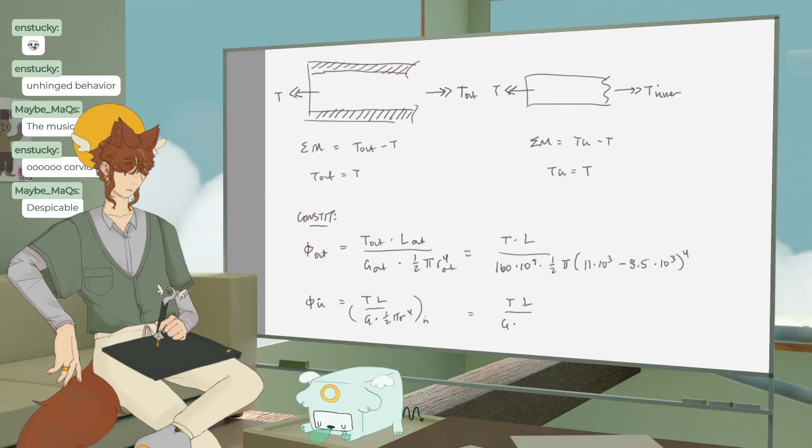And then T, L over G times... the thing is, when I set these equal to each other, the T's are gonna cancel out. What's up with that? I mean, I guess I could say torque is equal to force over area, and then just do one of them? Because normally, like... okay, I might be missing something, but we'll keep pressing onward.

80 times 10 to the 9th, 1/2 pi inner, 8.5 negative 3rd. Okay, wait yeah, it's negative 3rd. Okay we're good, we got that. And then kinematics is that because they're bonded, the angle equals this angle. But see, then if I try to solve for T it doesn't work - I just get the two numbers equal to each other, and clearly that's not right. So what am I missing?

I'm missing something with this tau - they give us a tau. And we know that tau equals TL over... what is it for? TL over J? No. How? Let's see, what is the equation? None of these things, I'll look it up real quick. Oh wait, let's see - oh, we can't do that. Okay, I figured out what we goofed on, but we're good.

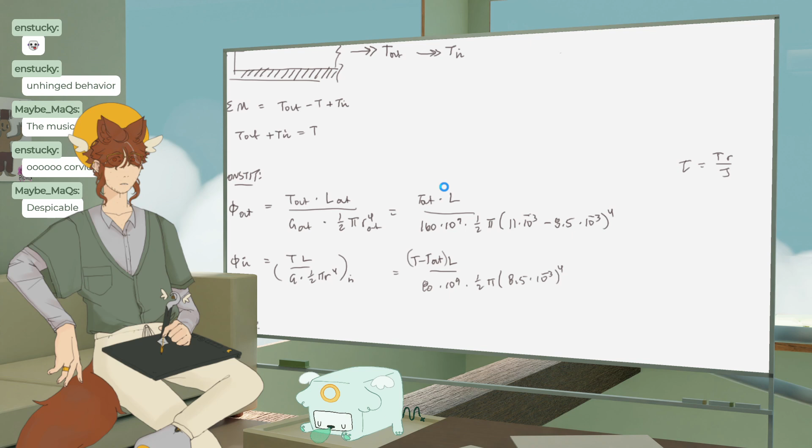I guess we just have to use maybe T outer equals tau J over r to get that. T out over. Let me plug in these numbers real quick.

Oh god, okay. 160 to the 9th times 0.5 times pi times negative third minus negative third to the 4th. 9 point...

T minus T out over this whole thing, and I'm just gonna switch out the 160 for the 180, for the 80. Oh wait, actually it's okay. I can just delete all this.

Oh, that seems wrong. 655. Maybe not, I could be right. Oops, not 6.6, just 6.97. Alright.

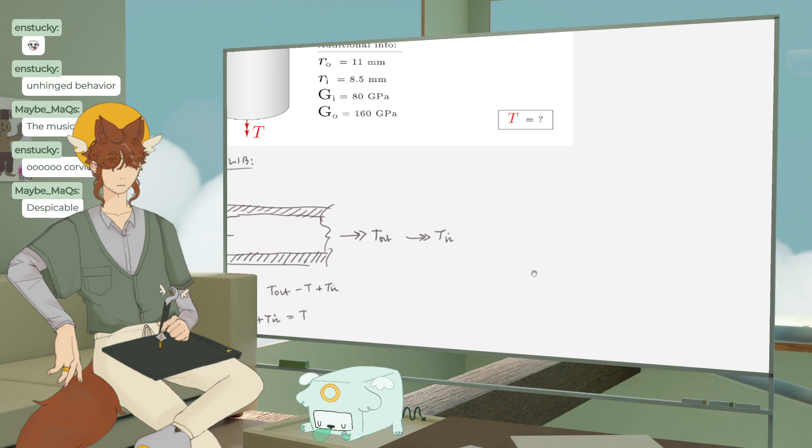So that's gonna equal, what do we say? Megapascal 60 times 10 to the 6th times 1/2, and then the 11 times 10 to -3 minus 8. Alright, I don't know if I have to do the biggest one. Probably the biggest one, it seems like it might be on the outside. And then over R, so I can just make this to the 3rd instead of the 4th.

60 times 10 to the 6th times 0.5, 11 to the negative... Okay, not promising. Times 655 plus... Actually, this seems like a lot.

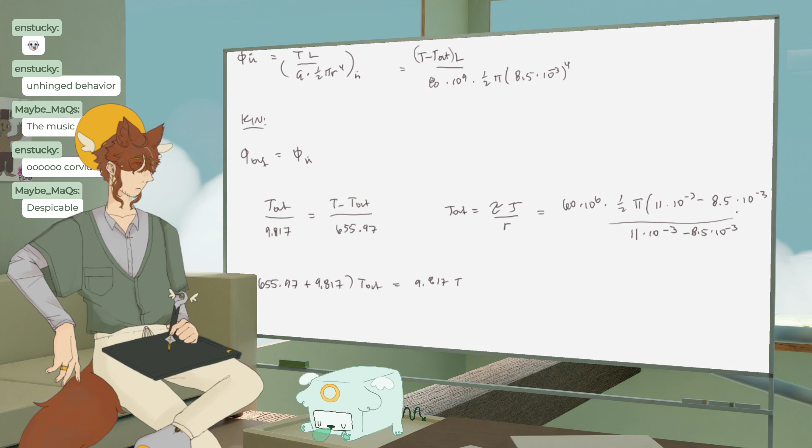Boop, boop, boop, boop. Oh, I'm deleting everything. We divided by this thing instead. Oh, my calculator's almost out of battery. Okay, 1.47, this times this. I don't know, I'm shooting in the dark here, but...

Oh, oh, oh. Okay, it's close enough, I think it's close enough. Yes, okay, so that's what it is. So this was like 1.47, and then T equals 106.72.

Okay. I think that is a pretty good place to stop, to be honest. I think that's epic, swag even. Yeah, that was fun. I think I'm gonna call it.